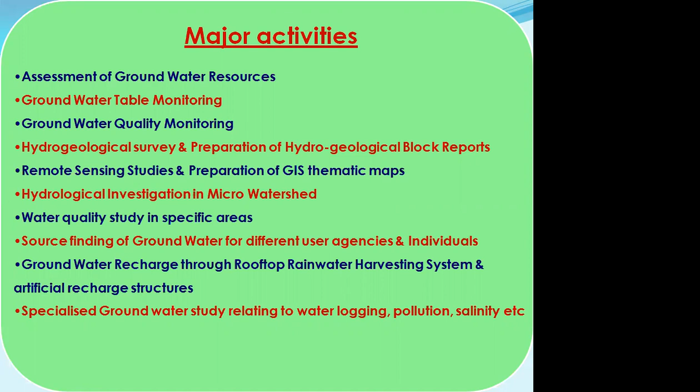And also in different externally aided projects, we undertake studies like specialized studies, taking consultants from institutes of repute like the Indian Institute of Technology. So these are the activities.

This is water table and quality monitoring in different blocks and towns. The objective is to study the behavior of groundwater. We take groundwater level measurements 4 times a year, and we record that data in our divisional processing centers. So we have processed data over a period of 10 or 20 years.

At present, we are one of the implementing agencies under the National Hydrology Project. Under that project, the objective is to share groundwater level and quality information through India WRIS, the India Water Resources Information System. We have at present over 1,000 monitoring stations in the state, with a plan for another 550. We have shared information about 450 stations, and we are planning to cover about 1,050 monitoring stations' information.

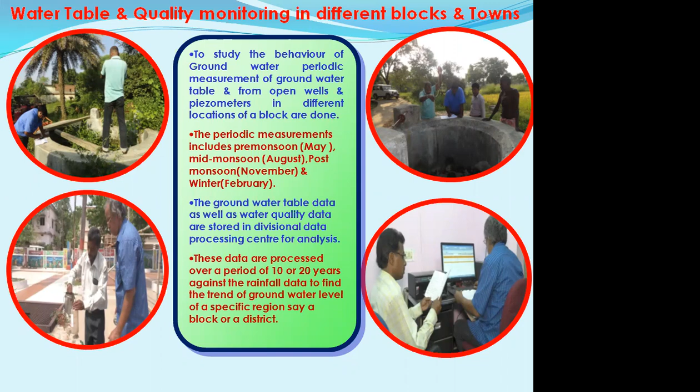This is the special research study for the externally aided projects in Hydrology Project 2. We took up 2 research projects, one being the delineation of waterlogged and salt-affected areas in the coastal tract of Odisha. We took IIT Roorkee as the consultant, and under their consultancy, our technical team worked and brought out the report.

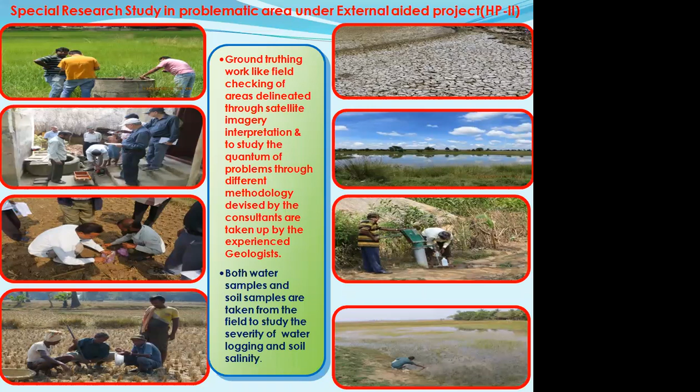These are some of the methodologies in the field which we undertook, like soil sample collection and water sample collection, and we delineated the area.

So we undertook, sir, feasibility studies for artificial recharge in micro watershed areas. Different methods, hydrogeological parameters, as well as site conditions are meticulously studied before planning artificial recharge projects.

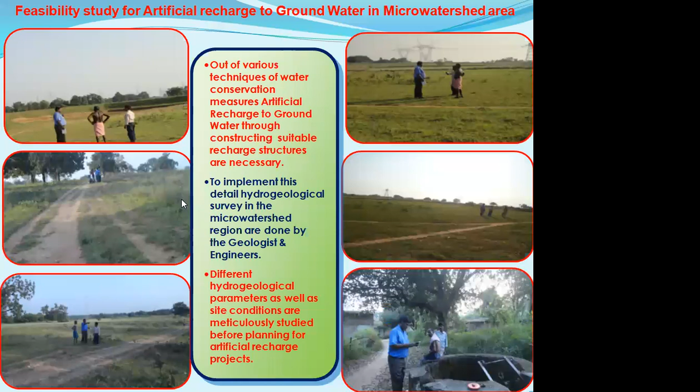The spilled water enters into this pipe, and we have a groundwater recharge shaft, and the groundwater is recharged to the aquifer.

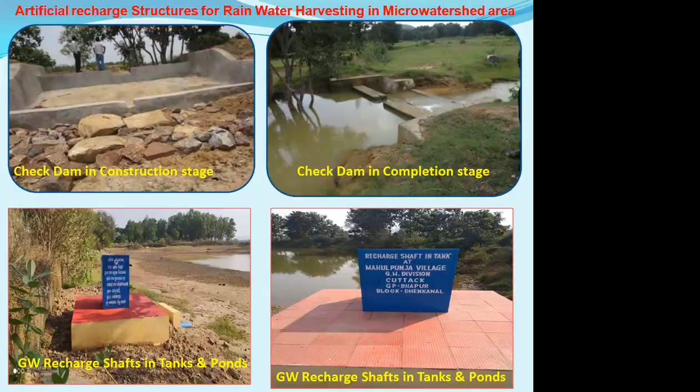Again, in urban areas, we undertake feasibility studies of rooftop rainwater harvesting. Different parameters like rainfall data, roof area, aquifer type, and depth of occurrence of aquifer are studied, and owners of buildings are motivated to implement rooftop rainwater harvesting systems in their buildings.

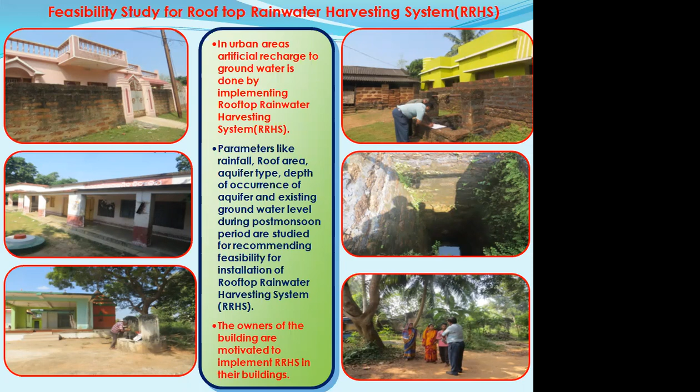These are some photographs of the rooftop harvesting systems in urban areas. We actually implemented this in the first phase, from 2014 to 2019, and in that period we covered 9,000 private buildings and 300 government buildings under this rooftop rainwater harvesting system.

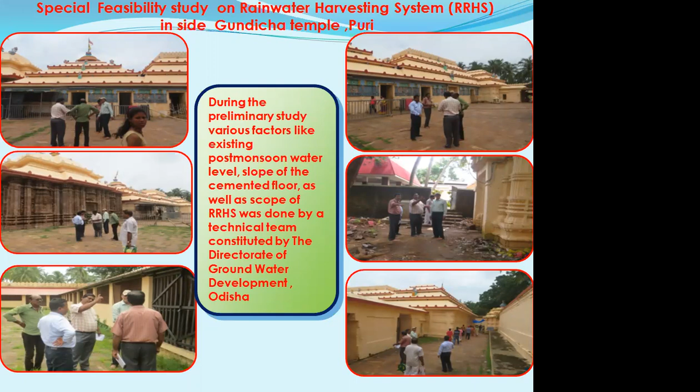So in Puri, at the Gundicha temple, special feasibility studies for implementing rainwater harvesting systems were studied and implemented. In 2019, it was implemented inside the Gundicha temple.

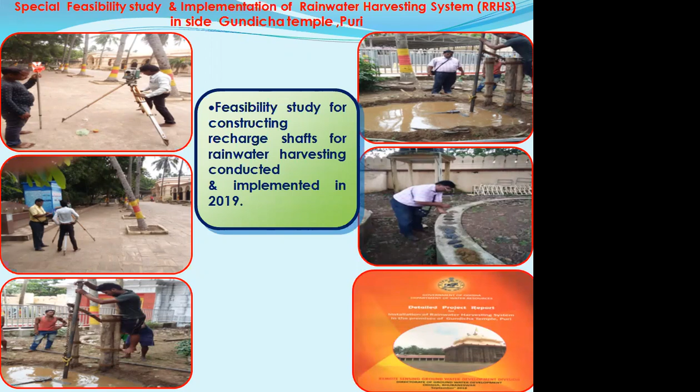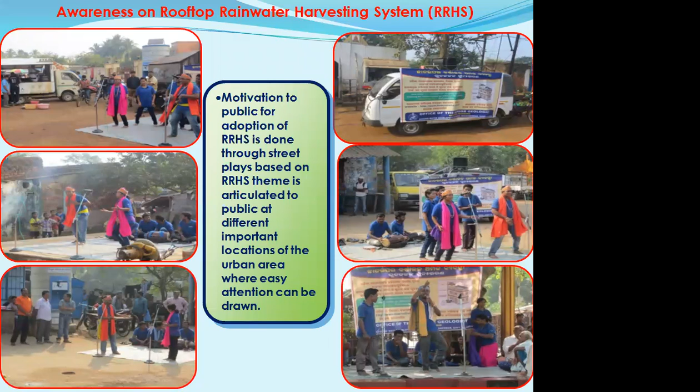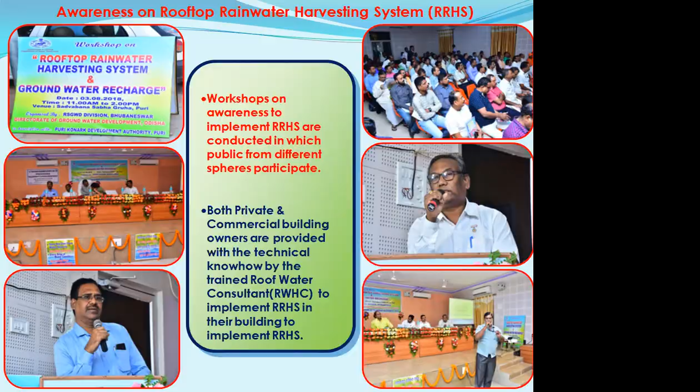Also, both private and commercial building owners are provided with technical know-how through workshops conducted by this organization. And that's all in my presentation.

So I have actually prepared a short video. If the jury members permit, I can present it here. This is 10 minutes. No, we don't want the video, we have some very specific questions. Let us first address that.

Yes sir, I think this is an excellent exercise, what you have done. However, I have two or three very important questions. Number one, how are you measuring the outcome of the rainwater harvesting? Are you measuring on a regular basis? What is the impact on the existing groundwater at various places in your state?

Number two, what are the problems you are facing in the maintenance of the rainwater harvesting systems? I have seen at many places that a lot of capital investment was made initially, but over the last two, three, four years the whole thing went to waste because there was no proper maintenance. The pits that were dug got covered again with concrete and other things, and there was no rainwater harvesting going on. So what is the regular monitoring and maintenance process you have adopted? These are my two first fundamental questions.